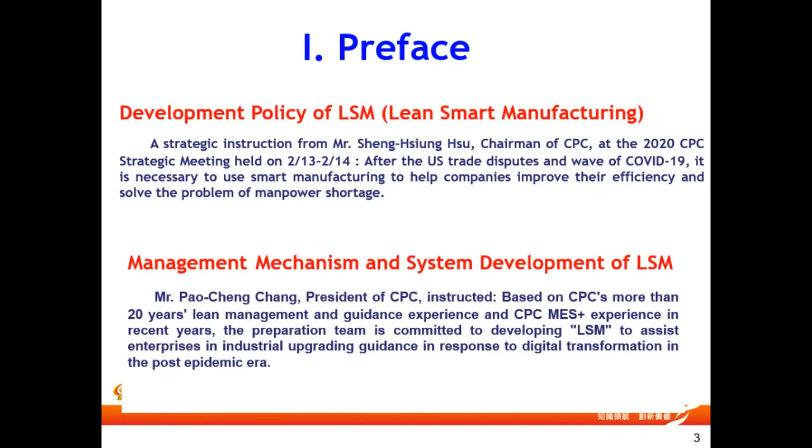More than 1 year ago, in one of the strategic meetings we held here at CPC, Chairman Hsu declared the strategic objective to help more industry become more efficient and effective. And President of CPC, Mr. Chang, also told us that we should build on lean management so that we can develop lean smart manufacturing. This is how LSM came into being in the first place.

So what are the relationships between the two concepts? Many people think smart manufacturing is just about automation and the use of a lot of information technology. That's not right. Actually, smart manufacturing must be integrated with management.

Many people in the industry may feel that there's nothing wrong with our manufacturing processes. However, the efficiency or performance are just not as satisfactory, or the automation level of the production line varies greatly, and there are new machines and old machines.

How can we make sure that our smart system is fully integrated with our existing manufacturing system? If we can put into place lean management, we will be able to make more efficient and effective use of our resources. And when planning production processes, we can also take into account industrial transformation.

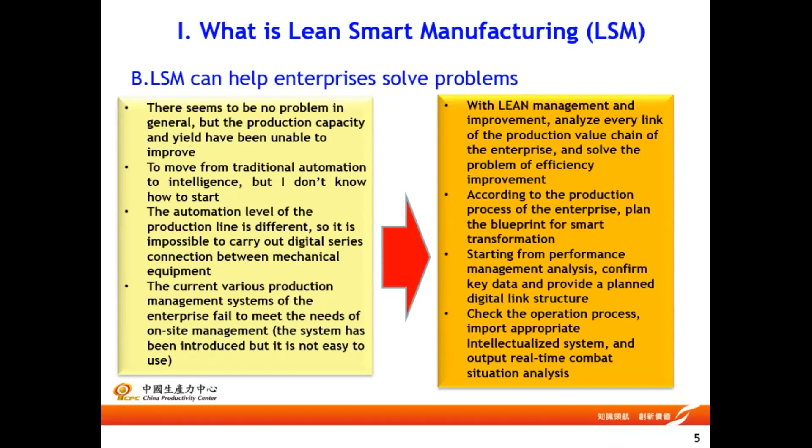Data collection can be better combined with our management and performance management analysis. At the end of the day, we want to have real-time combat situation analysis. In other words, LSM will be the key to solving all the problems faced by the industries.

LSM, simply put, aims to build on green energy technologies, providing lean management and services, and by applying the CPS, we will fulfill the development of Industry 4.0.

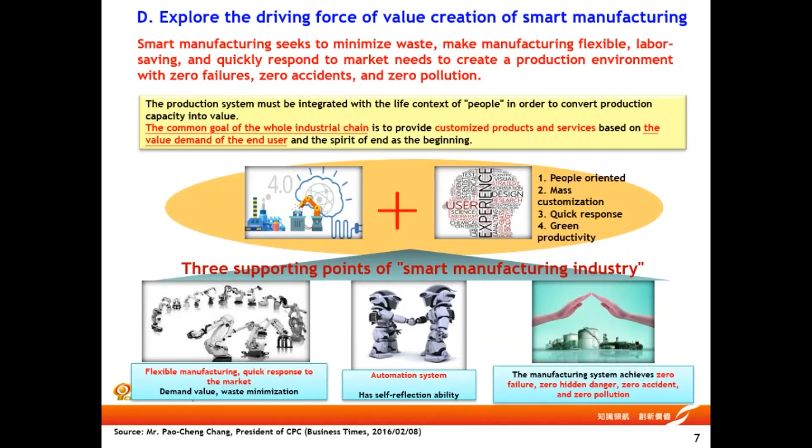Speaking of smart manufacturing, there are 3 objectives. First, flexible production, better meeting needs of the market. We can have zero waste. Of course, smart system will be able to detect mistakes in the process and system. Ultimately, we hope there will be zero failures, zero accidents, and zero pollution.

The CPC team has come up with this particular framework. About more than a year ago, actually at the end of last year, we published the report on LSM.

To start with, under this framework, there are 6 tools. I will go through them one by one. The first one is, how do we use smart technology to achieve automation?

There are 2 cornerstones of Toyota style production. The first is Kanban. The second is automation. But today, we use one smart Kanban, or S Kanban, or SM Kanban, or some people call it E Kanban. The second is E automation, or some people call it S automation. I'd like to introduce the first one first.

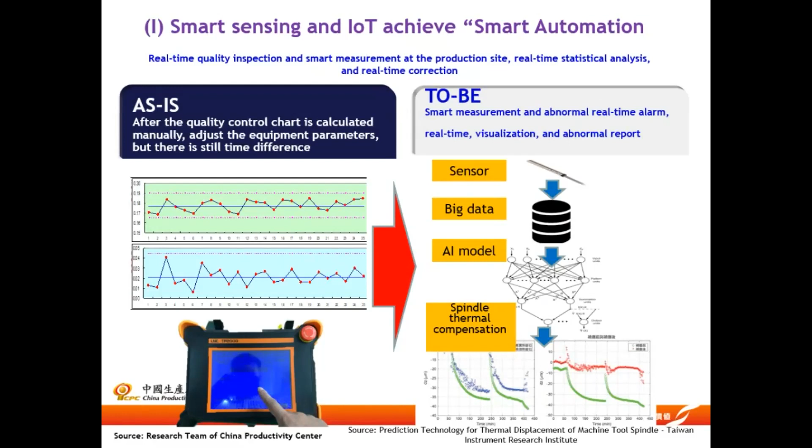When it comes to automation for Toyota style production, it means that there should be a warning in the event of automation equipment anomaly, and there will be automatic calibration or automatic suspension. In the past, we use human efforts to conduct statistics, observation. We hope that in the future, we can leverage sensors to analyze data. In other words, what do I mean by smart application? That is to allow the equipment to predict problems so that we can prevent the occurrence of problems in advance.

Secondly, with respect to parameters for chemical plants, in the past, we use a lot of labor. We hope that in the future, we'll be able to leverage the sensors to provide information to the control center. And then we can record all the data. And then in the future, we'll be able to trace all the data for our purpose.

I just talked about automated equipment or machinery aspect. But what about assembly lines? How do we deal with assembly lines? I can give you some examples. When you deal with shop floors, there may be circumstances of poor performance or defects. We use different lights to indicate the status, and for measurement we use some kind of a Vernier caliper to take relevant measurements.

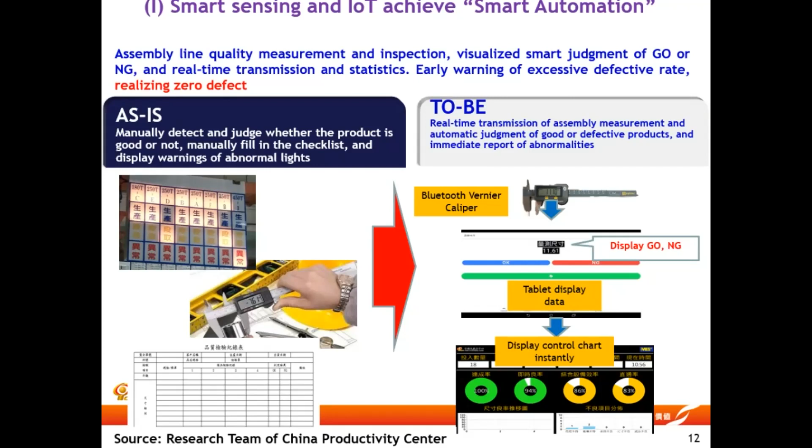But I don't know whether you have thought about that - after SPC, the data in the morning cannot be shown until this afternoon. The production has been completed already. That will be too late. We hope that in the future, through our smart system, through our Vernier caliper, we'll be able to transmit data on a real-time basis so that we can address efficiency issue on a real-time basis or quality issue. If the defect rate is too high, the information will be pushed to the phones of various supervisors proactively.

Now let's talk about the level of equipment. As we all know, before a piece of equipment fails, take a motor for example, before it fails, the bearing will be very noisy and the temperature will be higher. In the past, vibration will be higher, and we use our ear to hear and we use our hands to touch and feel the vibration.

But today, we can install a sensor. The sensor will record vibration, noise, and temperature information and send it to our visualization system so that we can understand the status of the equipment on a real-time basis. So this is about how we can transform automation into smart applications. Then I'm going to talk about real-time reporting to implement just in time.

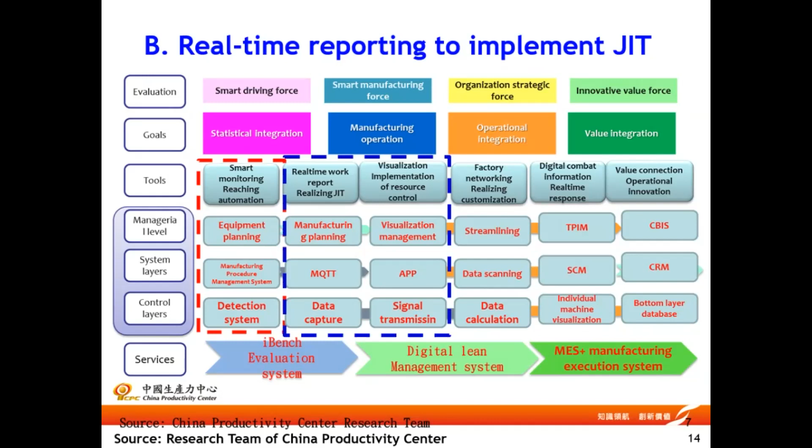But some concepts are quite interchangeable or common. Let me cover all these concepts together. First of all, when it comes to smart Kanban,

for traditional Kanbans, they are used for lean management or Toyota productivity management. The Kanbans were used to deliver process data, and the Kanban is used to identify or show information about the materials that should be prepared or the station to which the materials should be delivered.

But now we can use our phone or our computer screens. We can transmit real-time information about the production progress, and also working process information and the quantity involving work in process. So we can understand the dynamic information on a real-time basis. And the information can be used for preparation of materials, and then we can further implement or carry out just in time.

Because for Toyota style production, they use Kanbans to deliver on-site information when it comes to material preparation or material requisition. The Kanbans can be inserted to indicate whether the materials have been received or the stage of material preparation. Here you can see this kind of information through the Kanbans.

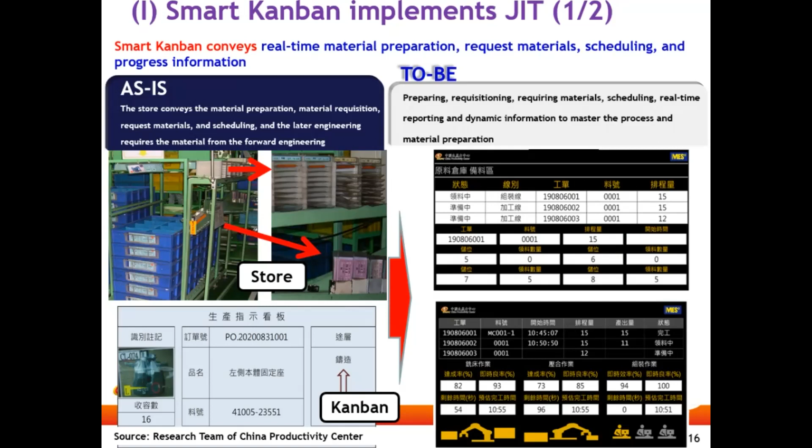However, the drawback is that you need to come to the site in order to see all the information. However, if your work job location is not here, it will be very difficult for you to gain access to the information. But we hope that we can use our cell phones to understand the current status of material preparation, material requisition, or material request and scheduling, so that we can support the promotion of JIT.

When we are doing material preparation or scheduling, we could use Kanban, as I mentioned previously. Another thing is that we can reduce our different categories of waste. In the past, we used a fixed quantity, a fixed location.

And in the past, we also used Kanbans or cardboards or bulletin boards or other visualized material labels, or we can use 3 different colors of light on the machine to indicate different statuses. And through the different lights, you can see the different status of operation. The red indicates abnormality, so it can show you information for the purpose of management.

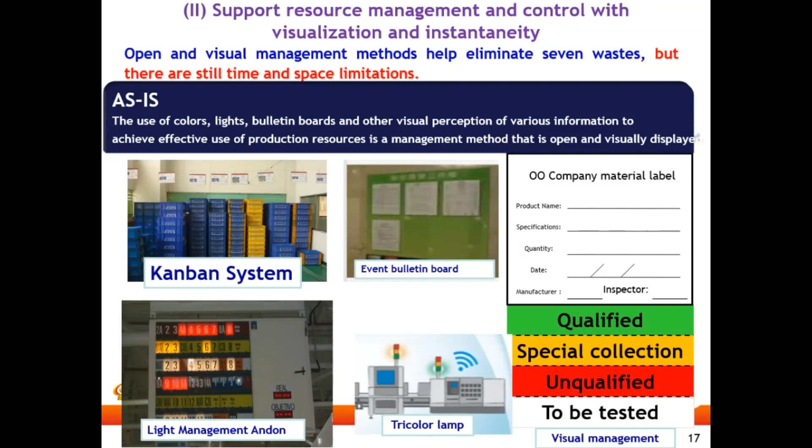So in the future, this is not what we want for LSM. We hope that we can have a control room style of information display, so that for different work sites or different production lines, information will be displayed on a real-time basis.

And on the processing line, we can use a set-top box to transmit information on a real-time basis. On the assembly line, we can transmit information about the quantity of the products handled, and also the status of the material preparation. The information as such can be integrated and can be accessible on a remote site.

Now I'd like to talk about things about factory networking practice. Recently, particularly people in Taiwan have been talking about digitalization or digital equipment. In the past, we dealt with analog equipment, and now we are looking at digital equipment and also optimization. And before the era of ERP, in the past, we had warehousing systems, accounting systems, production operating systems, which were separate. Now they are integrated into ERP.

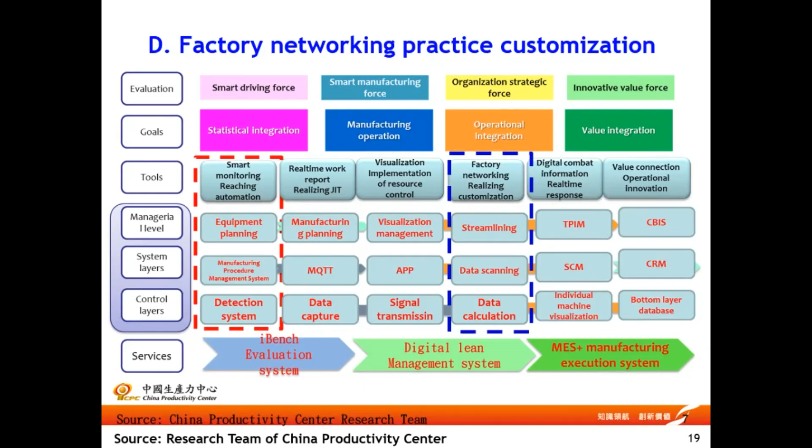So the key to LSM is to connect different equipment.

In the past, the weakest element is production information in the context of ERP. For the picking of materials, distribution of materials, the quality status, or the dispatch of labor, we need to use bulletin boards or forms or oral communication to communicate with the production site. And the production information on site, as well as efficiency and progress, such information could be communicated through daily production report, or can be typed into the computer system.

For daily production reports, usually they are input the following day, so you only see historic data. For SPC quality data, you'd be doing a good job if you can generate the data in half a day. So you can see some kind of gap in terms of information.

So through digitization, we can improve the linkage of different data. In the past, when it comes to TPS or lean management, all the production information was communicated through light signals or through Kanbans.

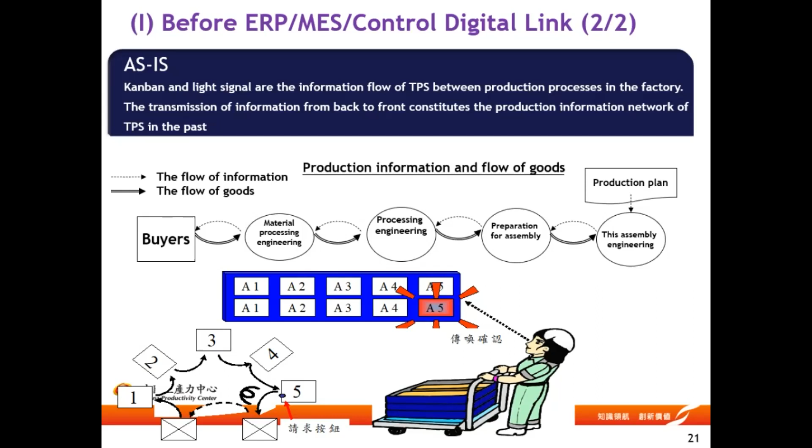In the future, under LSM, with respect to equipment, we'll use set-top boxes, and for assembly lines, it has to be highly customized. We need better control of different work pieces, and for the material warehouse, we can use SCADA, MES, or ERP. We can connect different data streams on a real-time basis, so as to achieve what we call a digital linkage.

So that's why we have come up with a simple structure like this. In the context of the production line, we have our equipment, assembly lines, through PLC. Why do we need PLCs here?

Because sometimes you may have heard of the term I/O links. For smart sensing and measurement, we can use I/O links for sending information to SCADA. Another way is to use PLC. PLC is not only for control; you can transmit data from sensors, and then the information can be sent to SCADA. And this is the architecture.

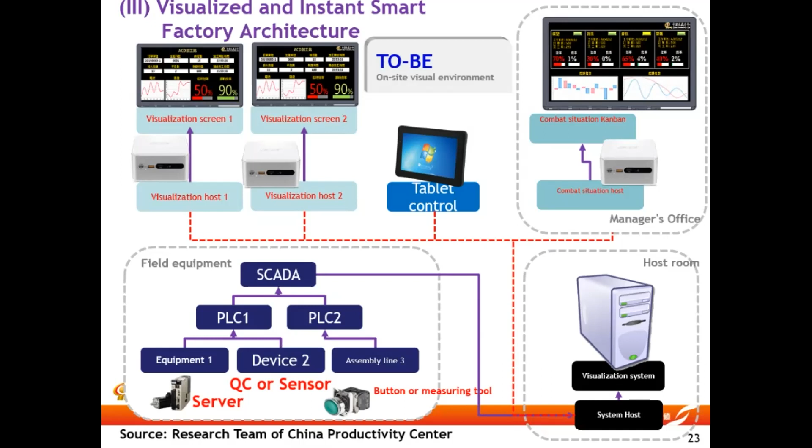Through our computing, we can display the information on a real-time basis in a highly visualized manner. After such data connection, our production data, dispatch of labor, or material collection can generate integrated data. On site we can have real-time dispatch of labor, and also transmit on-site data on a real-time basis to the ERP and the business system. The whole structure is highly digitalized.

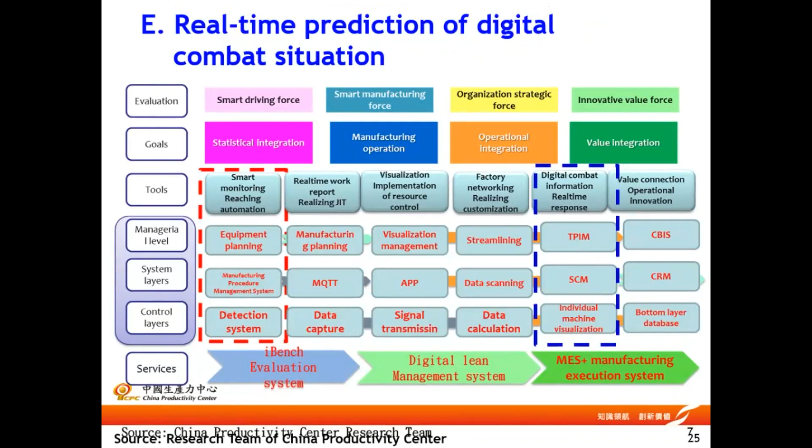Next, we would like to talk about digital real-time control and command. To begin with, traditionally, before smart technology was available, we relied on lights or status indicators for efficiency, quality, or quantity, LED lighting, or a whiteboard on which we wrote down the progress. Or sometimes we would issue alerts or warnings manually to our staff.

But this is a thing of the past. In the future, we're going to present everything from real-time efficiency analysis, performance analysis, management, and operational data. Once collected, it will be computed and linked to the ERP and MES system immediately. As a result, production data can be visualized in real time, transcending time and space.

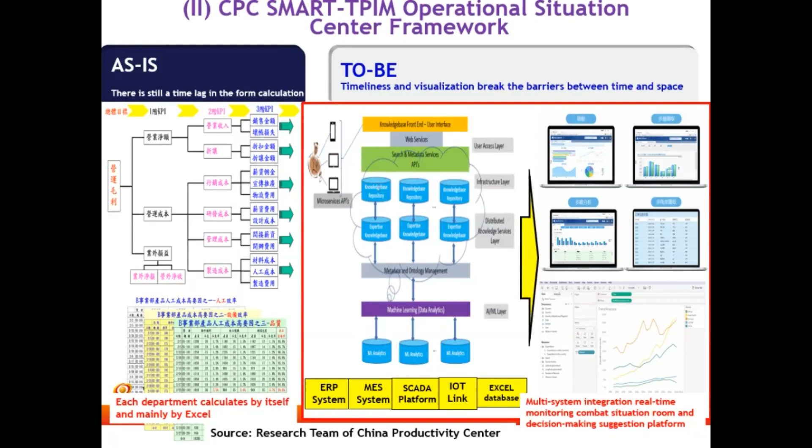Let me say it again: production information, to the far left, will have to be linked with costs so that we can produce adequate budgets. Therefore, efficiency is embodied not only in production but also in operational efficiency. We can set a range of KPIs to review production efficiency, so we'll be able to predict and preempt any potential problems.

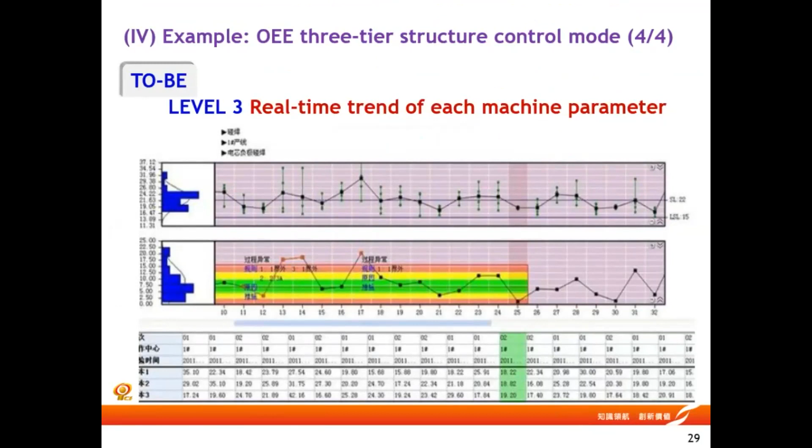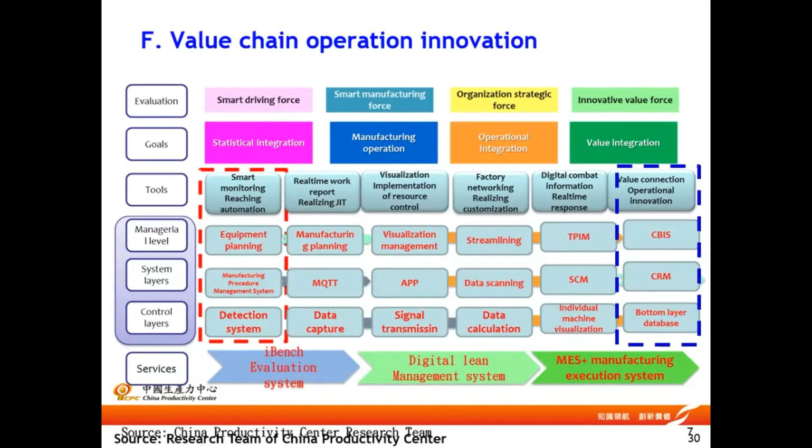All the parameters on different machines can be calculated and computed based on big data technology. So the parameters of different machines, how each machine is running, can all be monitored in real time. Last, I would like to focus on value chain operation.

Now, in Europe, especially with Porsche, basically, if you purchase a Porsche, the vehicle itself is not that expensive. But if you want something tailor-made, either the wheel or the tire, for small tailor-made elements, it will cost you more. Customization is the key.

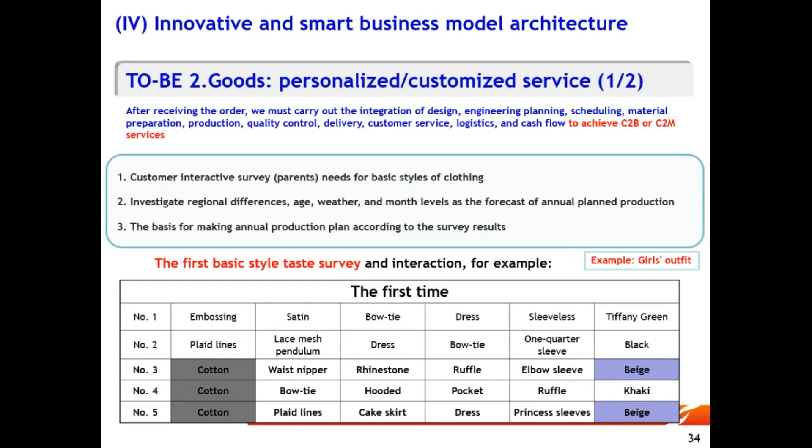Secondly, we have to know what products we are talking about. People are accustomed to wearing specific kinds of clothes of particular fabric. Some like checkered patterns, some like one-piece dresses, some like cotton clothes. So when trying to identify customers' needs, we can identify the fabric of their preference and the length of the sleeve their customers prefer. This is how we collect preferences of our customers.

But there are more details to pay attention to. For example, maybe they like to have ruffles, maybe they don't like to have buttons. With such knowledge, you will be able to notify your customers when you have new clothes coming into your store which meet their preferences.

We know that for customized products, the cost will rise on average by 20%. So if you already have such information in hand, you will be able to meet their needs without having to pay such a high additional cost. If you have membership, it's very easy for you to know their preferences.

However, production is still the key. When you purchase raw materials for your production lines, you have to use technology to help you save cost. That is why smart manufacturing can come into play.

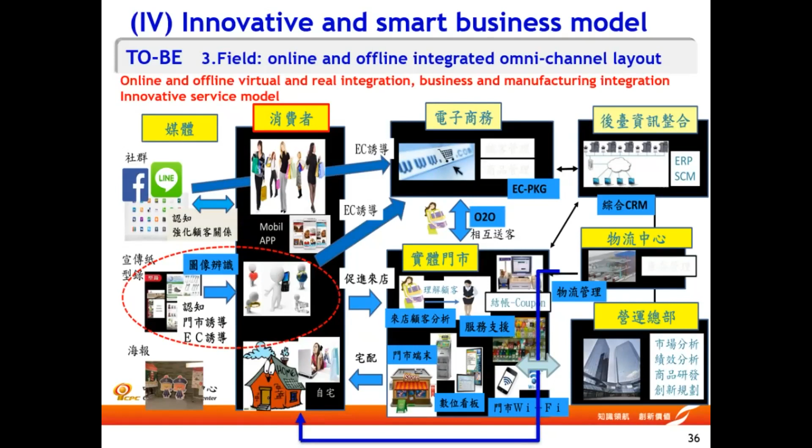Next, whether it's as-is or to-be, we are talking about omni-channels. If a factory is serving makers or customers—well, if we are talking about a brick and mortar store, a department store for example, the department store can sell products in the store or online. Do you think you can call yourself an omni-channel provider if you have online websites as well as brick and mortar stores? No, you are a multi-channel provider at best. You need to have digital connection to become an omni-channel player.

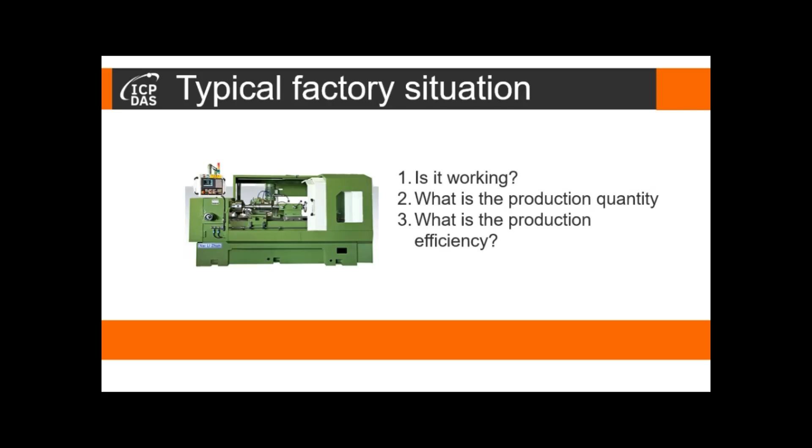In Taiwan, Malaysia, Thailand, or Vietnam, the manufacturing industry is facing a number of problems in the production process. Usually, the production line may have problems—whether or not the machine is running adequately, how efficient are the machines. So basically, we made our very important first step based on these systems.

I think companies first have to consider their own situation. If you have mostly Industry 1.0 or 2.0 machinery, you need to connect data through I/O, or you may need to set up additional sensors to obtain data. If you have machinery above Industry 3.0, my recommendation is that you can extract data from the internal data module. For example, Siemens PLC or Mitsubishi PLC. You should be able to obtain data directly from the machines, or you can use communication or additional sensors.

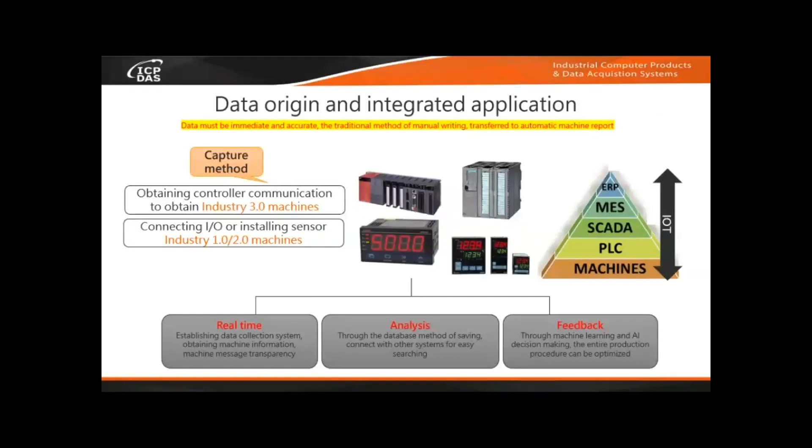Through the IoT, the information or data can be streamed, and then you can obtain real-time data. You can conduct smart analysis and provide feedback for decision making. This is a very important step. Originally the data were delivered manually, but now we can combine the data for real-time feedback and decision making.

Let me give you an example. When we are monitoring the status of machinery, we can set up a sensor called a smart meter. The function of the smart meter is to sense the status of the machine. In this example, the machine is working on the heating or drying of plastics.

We need to control the voltage and current of the machine. If the current is too high, that means the heater has a malfunction. If it continues to operate, there may be a fire triggered by the failure, or it may trigger quality issues. So by monitoring the current, we can prevent fire hazard, and secondly, we can avoid defective or quality issues.

Another example is the shoe making business. There is a gluing step, and temperature control is very important. We set up a temperature sensor and apply glue to both sides of the shoes. After gluing, the shoes go through ovens, so temperature control is very important. You can see upper, middle, and lower temperature points. The IoT sensor should be set up at the appropriate location, and data will be generated continuously so you can understand the temperature curve at different stages.

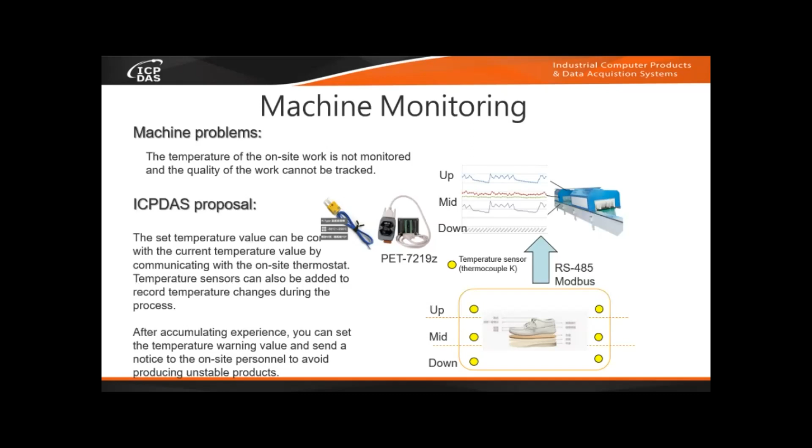We can trace the importance of temperature based on the quality of the products, set proper temperature parameters, and set up relevant warning thresholds for the temperatures.

In the production process, we can also use this kind of caliper to take measurements at different points. In the past, we did that manually, and there were time lags. Now we use Bluetooth technology, and the data from different points can be transmitted and recorded directly in the back office.

Also for predictive maintenance of important equipment such as motors, we can use sound, current, or vibration to diagnose or predict the current status of the motors. With a 3-in-1 sensor, by measuring the current, we can gauge the health status of the motor to see whether it requires further maintenance. If we go even further, we can analyze the data to find the causes of past motor failures.

In Taiwan or Southeast Asia, whenever we are promoting smart manufacturing or Industry 4.0, one important thing to bear in mind is that we often consider our needs first. Our company provides solutions beginning from the pain points of the companies, and then we set up our IoT equipment. If you have requirements for temperature surveillance, we'll start with temperature surveillance. If the use of electricity is important, we will start from there.

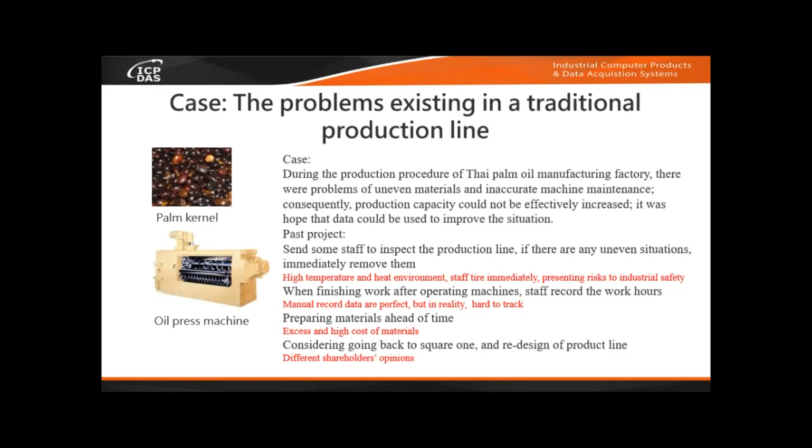So they were thinking about leveraging Industry 4.0 to address the issues. Under our company's advice, they set up some IoT sensors on their machines. Actually, it's a smart meter. For each oil pressing machine or motor, we set up a smart meter, and it will generate very important information.

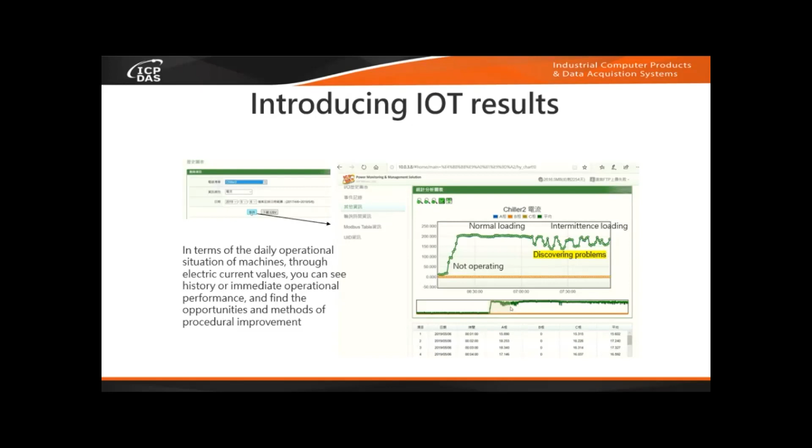The data are real-time, recorded or extracted from IoT controllers, and also stored in the IoT controllers. So the first step for smart manufacturing is that with respect to production line issues, we should first identify a pain point. For example, here we're looking at efficiency, and the parameter corresponding to the efficiency issue is electrical current. We can measure the different electrical currents, and then identify issues that emerge at different times. So we set up the sensors, extract data, and identify the root problems in order to address the issues.

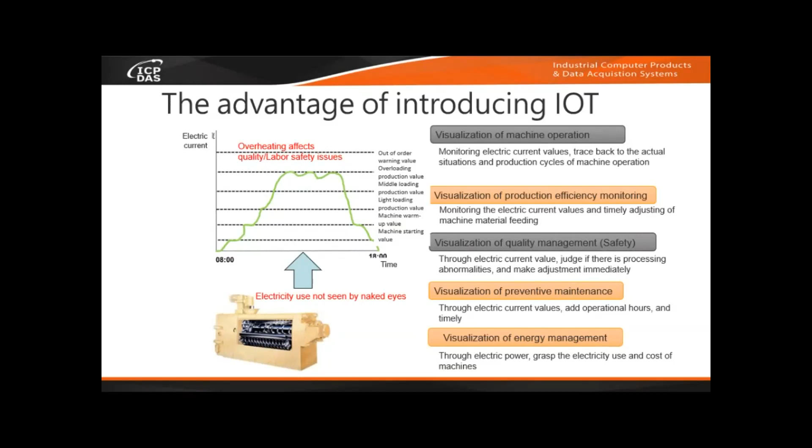So by setting up IoT sensors, we can visualize the situation of the production site. The visualization can help us manage the situation before, during, and after the fact. And then we can have a visualized platform to display all the on-site information.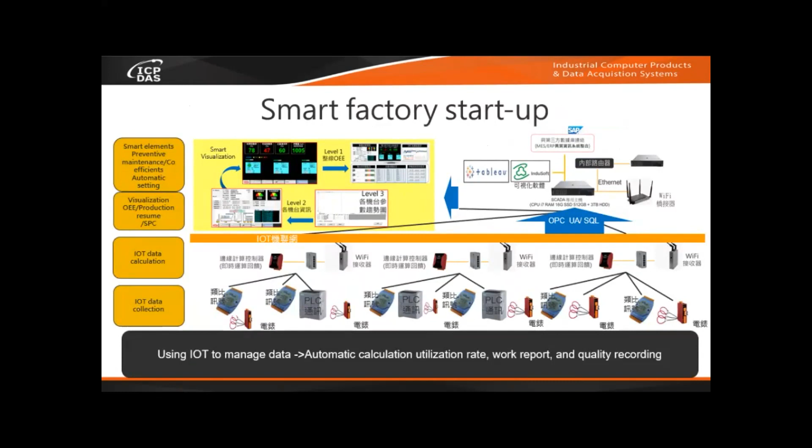For example, at the SMT production line, we can monitor the equipment and the productivity status of the entire production line. We can also use the Line app to send or distribute production information in real time to relevant people. So we can use IoT equipment to extract data, gradually expand the application, and ultimately come up with a smart manufacturing roadmap.

Let me give you another example. This is a factory that produces packaging boxes. They have very complicated production processes. They need to deal with different sides of the packaging boxes. And their equipment is very sensitive to temperature.

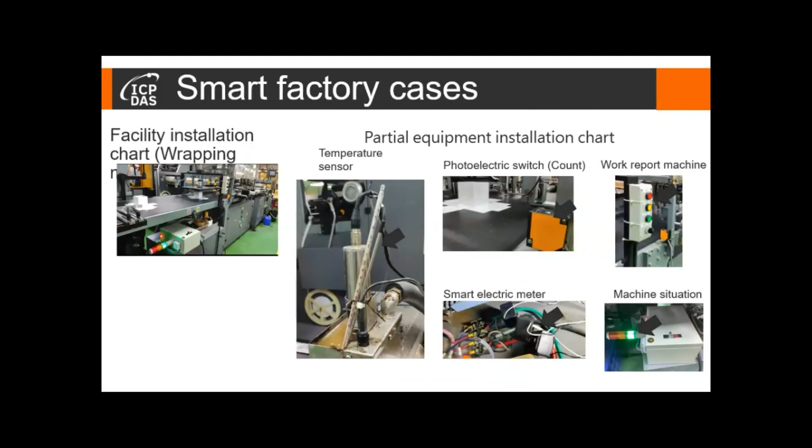So we set up sensors to take data regarding the pace of production, and also set up smart meters. After these IoT devices are set up, what kind of results can we see? First, we can extract production data every second, or maybe every minute, depending on the needs of the production lines. So that's the first step - we need to record the data.

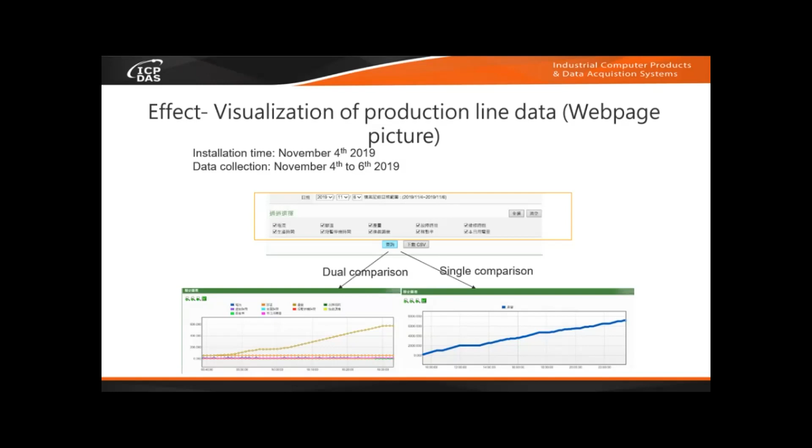And also we can have real-time monitoring. After the data are recorded, we will be able to compare the data by way of visualization, so we can see the changes in production by comparing production volume and production status. And then we can predict what the future will be. In this case, we can see the production temperature and the production volume. You can see the temperature is dropping at a circled portion.

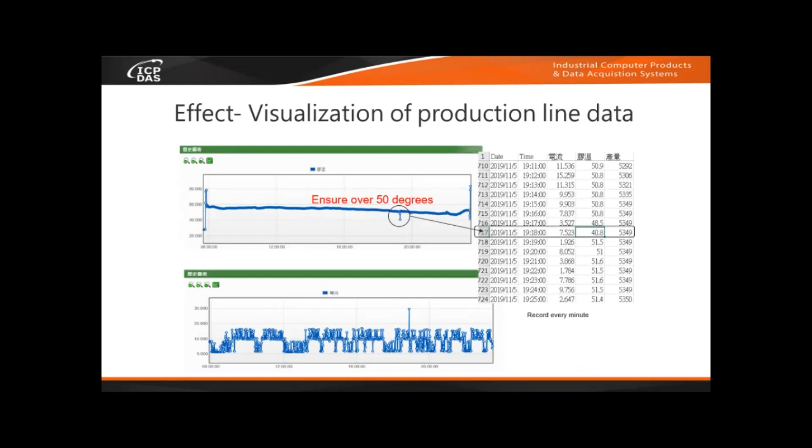For attaching labels to the packaging boxes, temperature is very important. So abnormality of temperature may cause quality defects. This kind of sensing is very important.

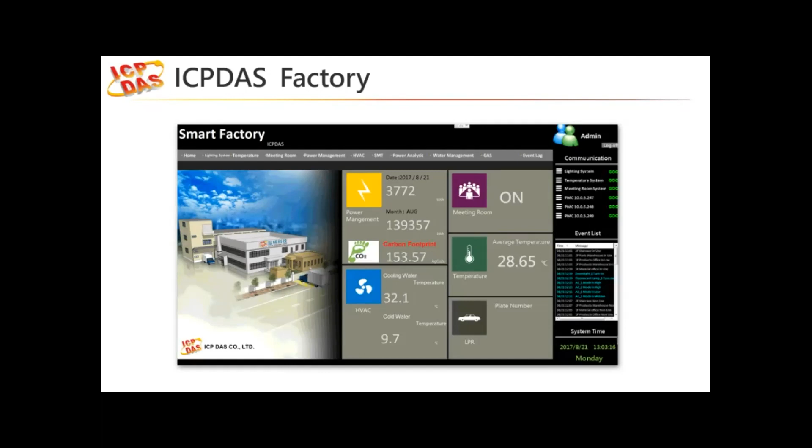So if we combine all the data, we will move to the upper level, that is SCADA. This is the smart factory management system we developed in-house. We will be able to monitor the carbon emissions, power usage, including the situation on the production line.

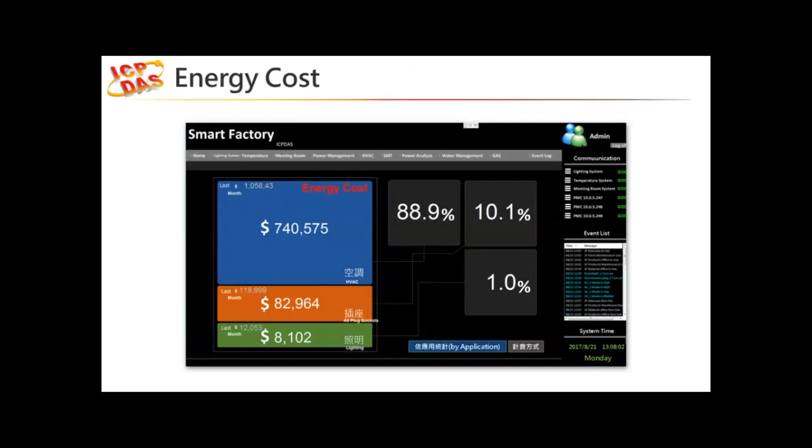At the same time, we will be able to calculate the cost, including energy cost, water usage, water cost. If you have a water meter, you will be able to calculate the cost of water used today. And of course, we pay close attention to the ambience of the office.

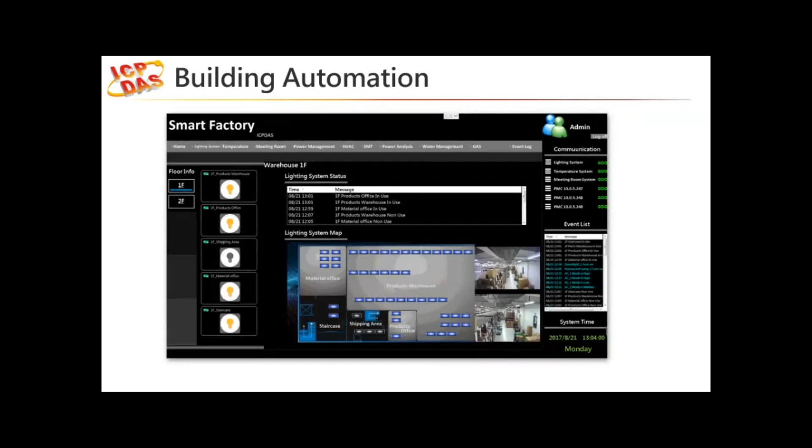So we do have sensors to check lighting, emissions. The same goes for warehouse environment. We can have very close monitoring of the warehouse environment. If there's too much humidity or the temperature is too high, alert will be sounded and measures will be taken to protect equipment inside.

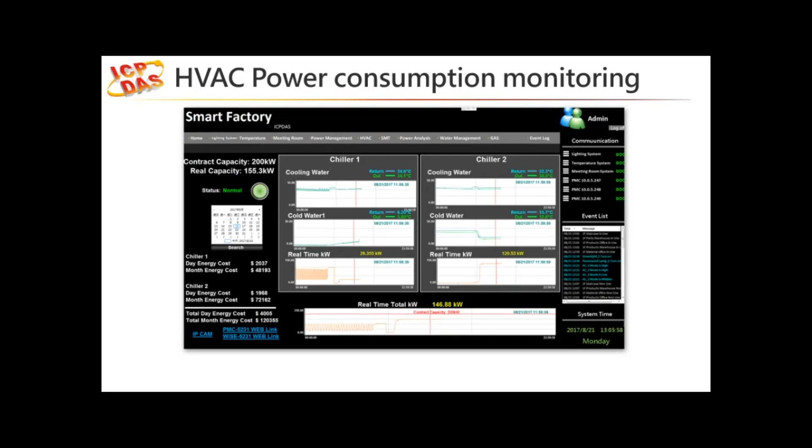HVAC system very often is the cause of problems. We have to make sure that you don't use up too much electricity, otherwise the company may be fined by local authorities.

Smart manufacturing is basically applied to the machine or production system already in the client's premises. So that is the basis. And then we identify pain points where we will install sensors. That is what I meant by from point to line to plane. In other words, you don't start installing a huge system from the very beginning. Rather, you start small.

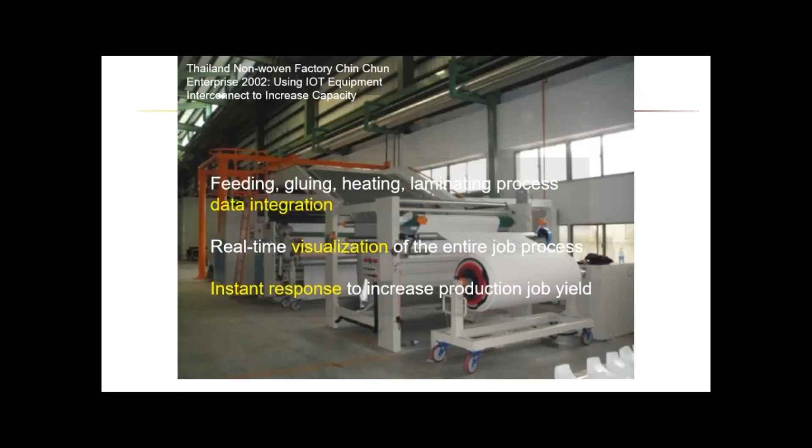For example, in this Thai oil mill factory, this is how they began their smart manufacturing journey. The same goes for this non-woven factory in Thailand. This is another example in a food factory. The PLC data are collected so that the temperature of the production line can be better monitored.

This is another example. We help a company in Malaysia, again, by collecting data from all the machines on the production line. We will be able to provide visualization of all the production data. Most important of all, we provide training so that they can develop their own system in-house.

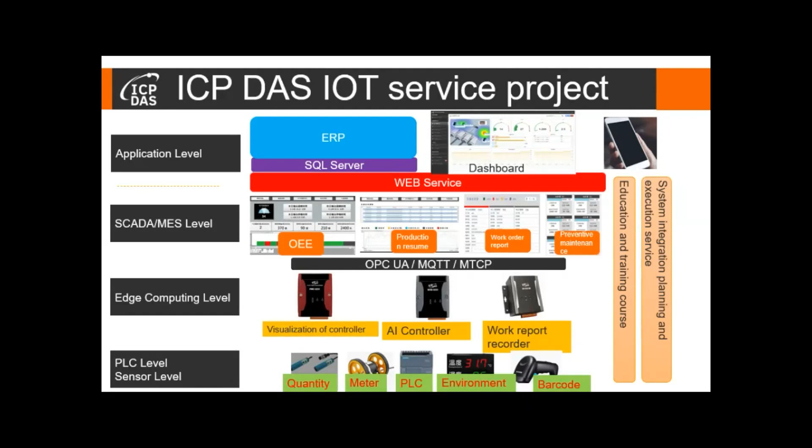That concludes my presentation. Thank you.

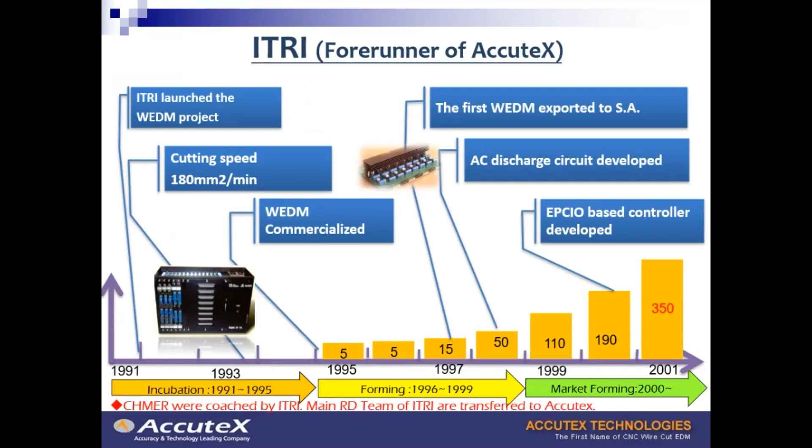development of CNC. For decades, Taiwan's technology was not up to par, but now we have been able to produce CNC, very sophisticated CNC. Here you can see we have many clients based in different parts of the world. And you can see in this particular sector, our competitors are in Japan mainly and in Switzerland.

Why are there so few CNC makers? It's because it's very difficult to get the key technology for wire EDM. You have to develop your own core equipment, including lathe, water, and temperature control systems. So it's a very highly integrated solution.

There are a few existing solution providers, not to mention the solution we are looking for must be very accurate, precise, and cost-effective. So because of the demand for CNC software and hardware, once they are developed, it will be easier to meet the need of Industry 4.0 because we control the CNC hardware and software. We will be able to help our clients.

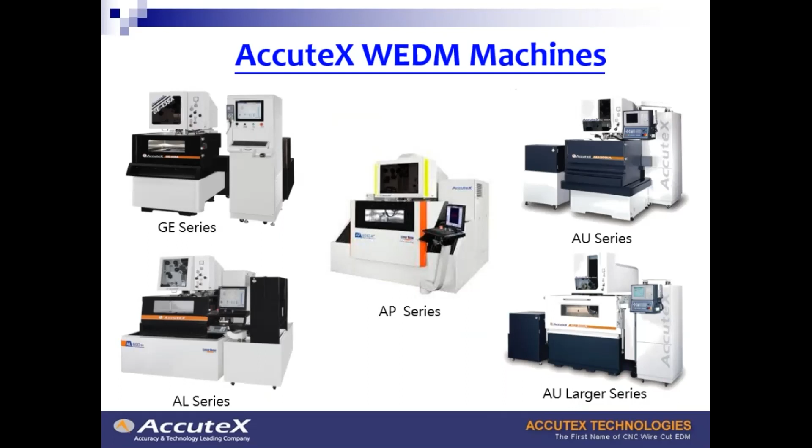Here's the range of our products. You can see the different sizes. Wire cut is usually used for mold manufacturing. There's something unique about mold. In most production lines, usually there's a set production quantity, but for mold, usually you only need one.

However, if you want to become Industry 4.0 compliant, you need to go for automation, auto design, automatic feed of material, automatic detection. These are the criteria of Industry 4.0 or smart manufacturing. So we have to do more than just automation.

In Taiwan, there are many machine makers. They have come up with their own version of Industry 4.0 software or SCADA. They have their own MES systems and develop their own detection systems. I asked these companies, among their clients, how many use products only from their company? I think many big companies dare not say 100%.

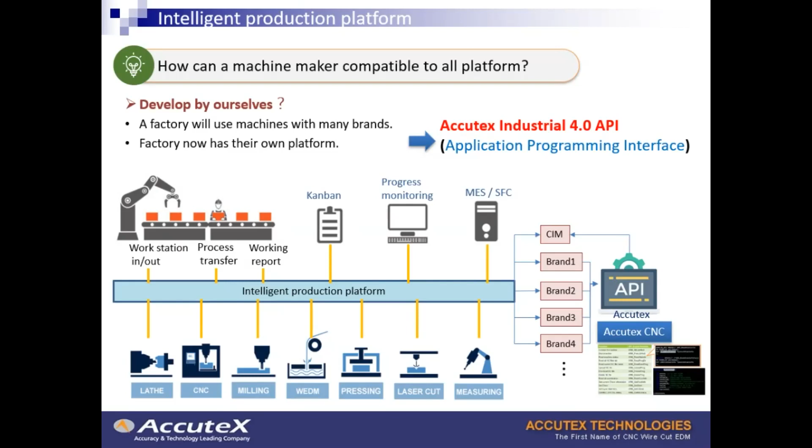If the client wants to build a new system, a new complete system, we need to provide a total solution which is able to retrieve and store data, even from the design stage to processing, oversight, manufacturing, processing, and report. This platform can be very helpful.

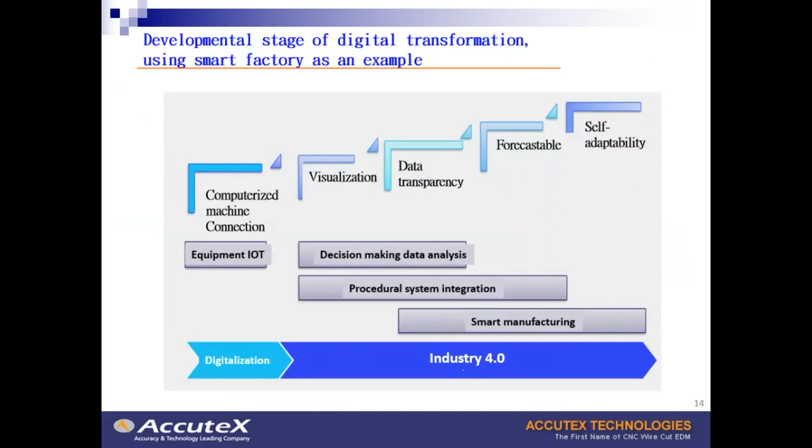From digitalization to Industry 4.0, we need something visual that can be visualized, or something that can be used for prediction.

So when you have a project, you need to begin with a design. From CAD, you need to convert to CAM, and then conduct simulated analysis or structural analysis. That is for CAE, and then different programs will be required, for example for molding or CNC. And then if you need certain precision, you need a measurement at the stage of CAD and CAM, the measurement critical points will be generated.

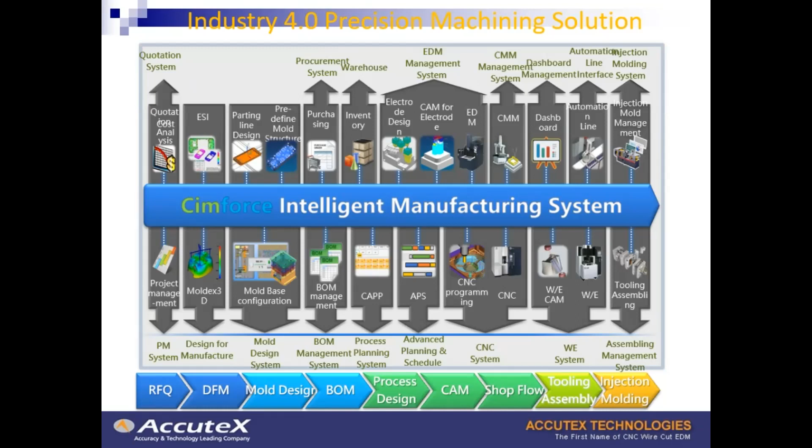And then purchase system, inventory systems, CAPP, CNC programming, CAD/CAM system, EDM. After processing, there is automatic measurement taken, and then you can use self-guided vehicles or robots for transportation. Then you can use RFID for system determination, and a corresponding program will be activated. So that's the smart manufacturing structure I just talked about.

For a machine maker, the final two layers, shop floor level and control level, they fall within the scope of CNC. So the data will be sent upward to SCADA or MES.

Now I'd like to talk about the smart manufacturing system using our wire electrical discharge machining, or WEDM. First of all, we use CAD/CAM for design, and as a result of the design, the CAD will generate the CAM path or three-dimensional paths. Then three-dimensional measurement programs will be activated, and through the RFID of the same workpiece, we know what are the critical points to be measured.

Data will be sent to the cloud for computing, and then you can have automatic scheduling or programming, because we have a network line connecting with the central system. So all the Cimforce information or equipment related information can be extracted. We can get whatever information the customers need.

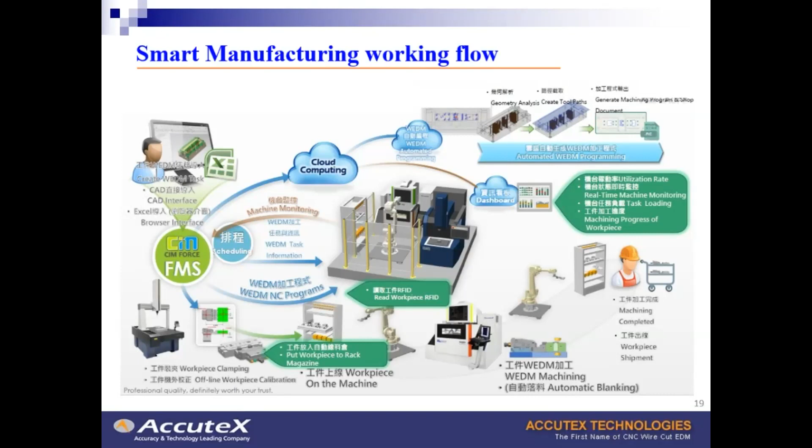This machine has an automatic feeding system, and there is an automatic system that automatically removes waste. Also in this system, you can see an automatic warehousing system. So from beginning to end, people don't need to handle any machine. People just need to prepare the materials in the warehouses, and the entire processing takes place fully automated.

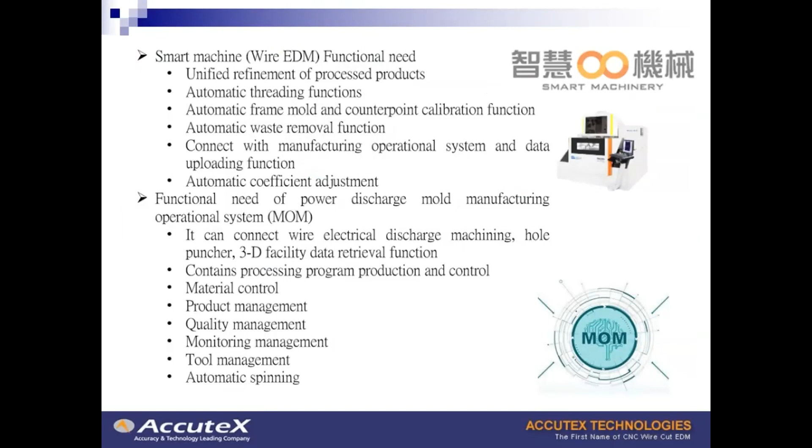For WEDM for smart manufacturing, I think the processing should be consistent. We need to have automatic threading functions, automatic mold calibration function, automatic waste removal function, and also information connection function.

I'd like to give you two examples. In the past, we rarely did that. The first is the automatic collection of waste. In the past, even though you may have automatic feeding, the waste still needed to be removed manually. So that's probably the only handicap for the automation of CNC. This is also perhaps the largest hurdle.

To address this issue, a few years ago, we started to design an automatic pickup step for waste. Traditionally, it was handled by workers manually. Ultimately, we developed a function in the equipment or machine. Towards the end of the processing, through determination by the machine, there is information that can be generated, and then a device will be used to pick up the waste.

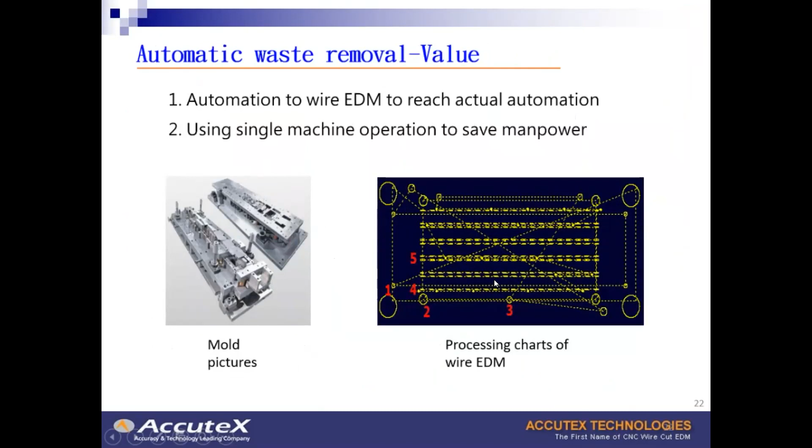So for a mold, you can see many holes because this is a mold. There are a lot of wasted materials, and the machine needs to determine the processing status and also the voltage status so that the waste can be properly removed.

Another function is, in the past, for a workpiece, when you mount a workpiece, we need to adjust or calibrate the horizontal and vertical orientation of the workpiece manually so that we can achieve proper alignment. But it could not be automated because manual labor would be required, or I can buy very expensive fixtures, but you need very time-consuming calibration. So how can you ensure proper precision?

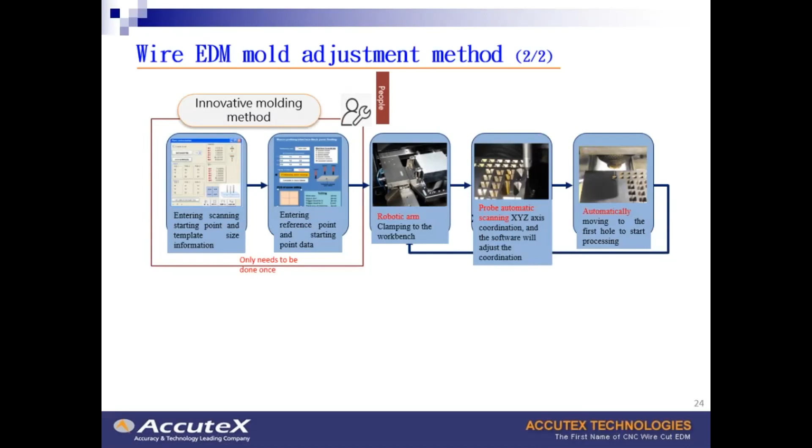And then we came up with a method. We set up a 3-directional probe. So after the workpiece is mounted, we still need a probe for final calibration along different planes. After the calibration, the program will accommodate or perform a rotation based on the result of calibration. So this is the most important benefit that can be generated through programming like this.

So this slide depicts automatic mold adjustment. You can see calibration is also conducted automatically.

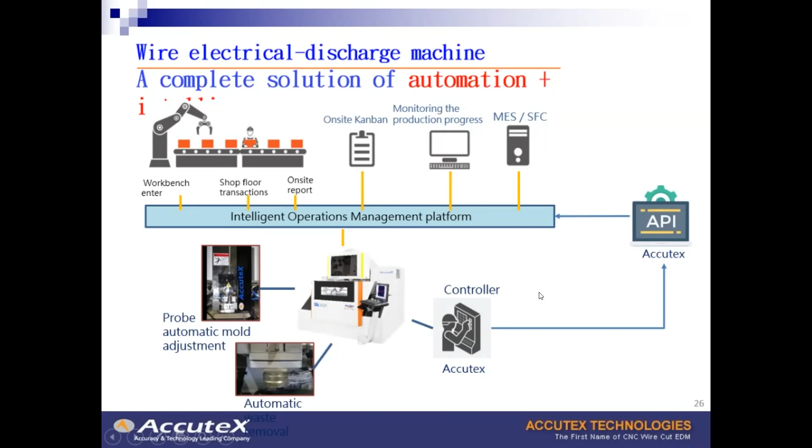So in addition to what I described, we had our API for connection with Cimforce, and automatic threading and automatic pickup of waste and mold calibration. Then in combination with CAT and also the robots, we can address the smart manufacturing needs of a factory.

This slide depicts the steps required for smart manufacturing in the context of wire EDM. For example, you need to define the aspects of parts processing. For this particular workpiece, we are not just talking about wire EDM, there may be other working processes or engineering steps. We can have automated division of workflow in the factory like this.

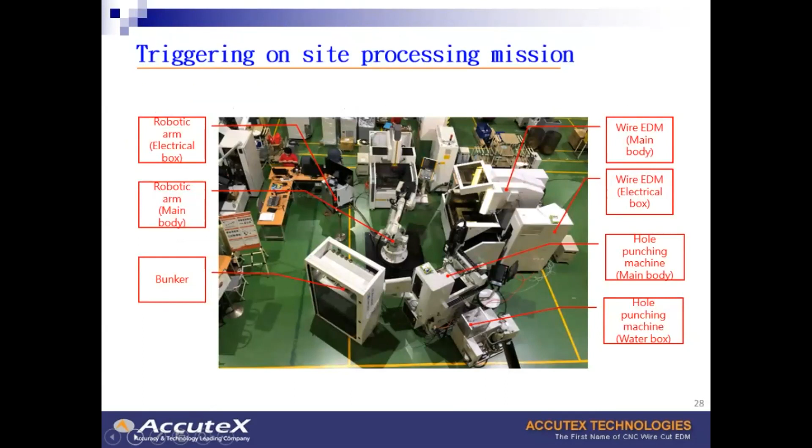This is the picture of the company's shop floor on site, and we show this to our visitors. What you see is just automation, but you don't see how information flows are automated.

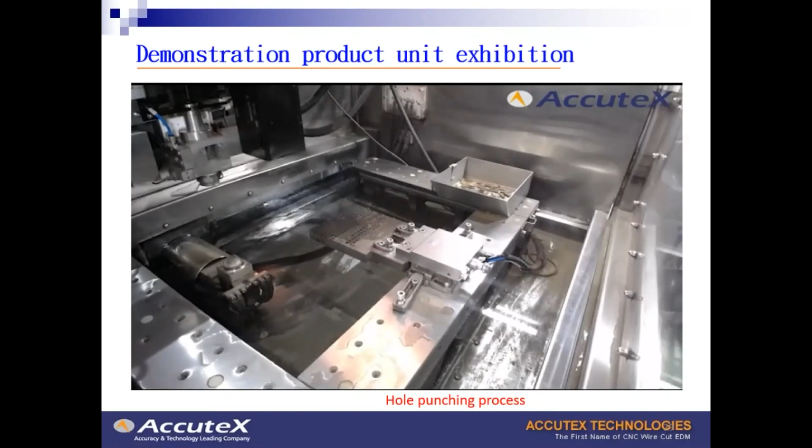This is a robotic arm. We can have an automatic pickup, and then the workpiece, the holes on the workpiece can be punched, and then the robotic arm can be withdrawn, and then we can perform other wire cutting related steps. After punching holes, we also had automatic threading, and after automatic threading, the processing will then continue.

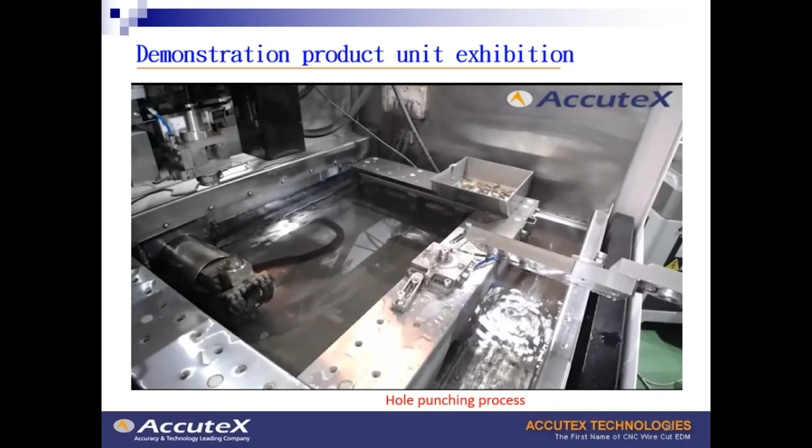Of course, this is fast forward, but after the process, you can see that this step actually in the process, the waste have been picked up and discarded. You can see the electromagnetic disc that picks up the waste, and then after the waste is discarded, the second step of processing is conducted.

I think I fast forwarded the video clip 50 times. Actually, it doesn't run that fast. It will take about 2 hours for this to be completed.

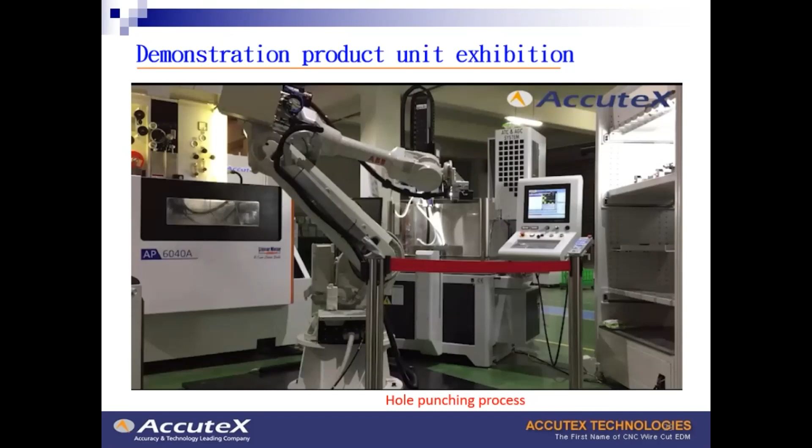So what you have just seen is part of automation. All the information has been integrated automatically. People don't need to operate or man the machines.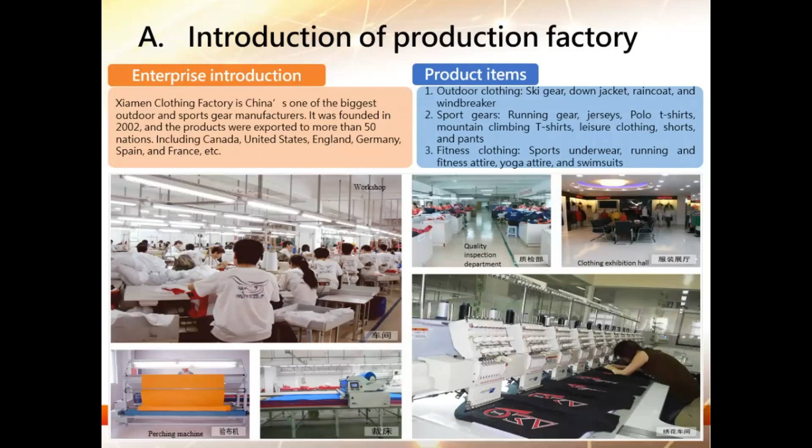Later, I'll talk about a port-o-rial system. In other words, when they built the production line, the port-o-rial system will be the main system in control. For each workstation, the port-o-rial system will determine how this fabric will move from one stop to another.

So what are the problems? There are 5 problems. The first one is the performance of the production line cannot be monitored right away because manual work was used. But gradually, with the port-o-rial system installed, they had a better idea. However, they still were not able to monitor the defect rate, the performance of production line workers. Therefore, we began to introduce the visualization system, which must be combined with the MES and ERP system. Another problem is, in addition to this factory in Xiamen, the company has other factories in different cities, so in order to have a comprehensive grasp of the production efficiency, we introduced the Kanban system.

In addition to performance monitoring and evaluation, we would also like to improve on-site management. So smart improvement to the online operation was introduced so that defect rate can be better controlled. Of course, this company also faces problems in relation to warehouse management and salary management. However, my talk will focus on efficiency and performance improvement.

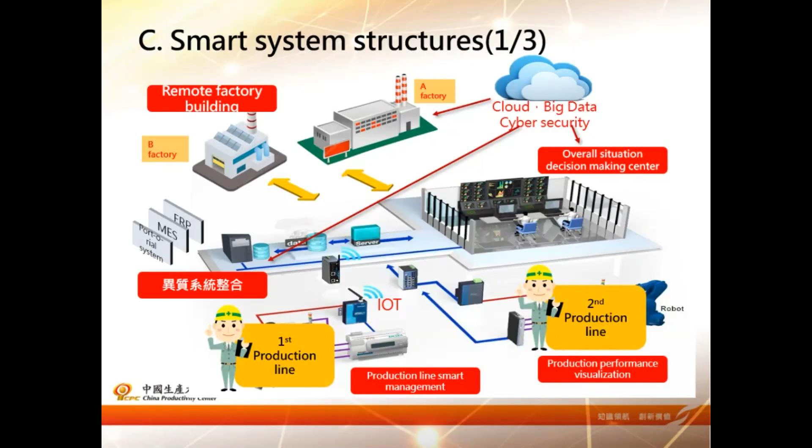So this is the heterogeneous information system I was talking about. At the bottom, there is the PLC plus sensors. Again, they are built on the existing port-o-rial system. However, at this level, you cannot visualize performance. That's why we have to combine ERP. Then we will be able to incorporate the workflow and staffing information.

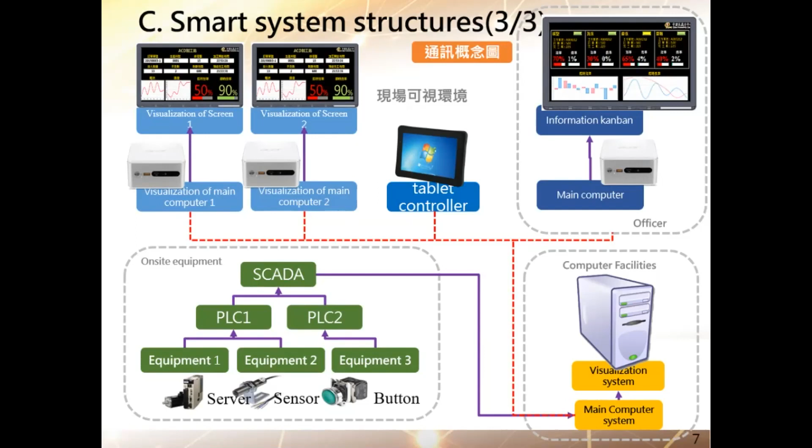Again, data across different factories can be monitored in real time, so the manager can do such monitoring remotely, analyzing what problems may have arisen and what action must be taken to address those problems. Back to the hardware, at the bottom left, there's sensors, PLC, and SCADA. Basically, this system is used to collect data from the production lines and send it to our computation center. The red dotted lines represent virtual installations, and the purple solid lines represent the hardware installation, the brick and mortar system.

Next, I'll talk about the production performance visualization, as well as the other two elements. First, the production performance visualization. On the screen, from left to right, you can see the steps taken to build such a system.

To the far left, traditionally, we have a paper-based system. We have to print out the tables and then fill them all out. However, with such a manual system, you cannot have real-time monitoring and analysis, and there may be errors.

In the middle, in 2018, uniform tables and the port-o-rial system were introduced. With the port-o-rial system, you can gather a certain amount of data, but it cannot be combined with other systems. That's why in 2019, to the far right, we introduced the smart system, where the online system and ERP can be combined so that everything can be visualized.

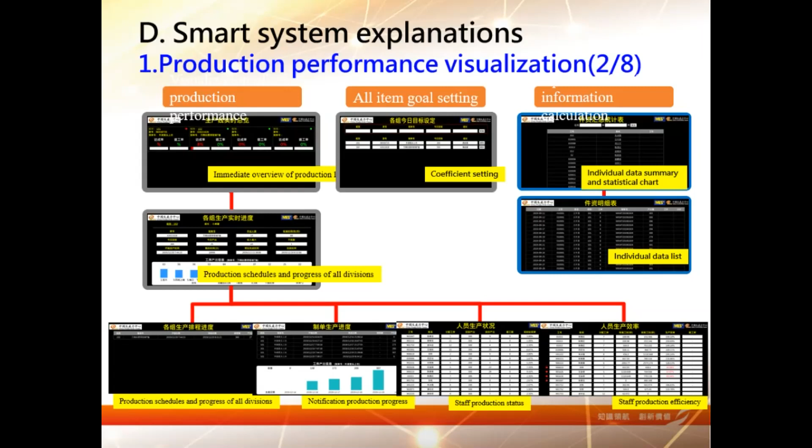Now let's look at the visualization system in further detail. Here you can see the production real-time overview, showing the situation on different production lines. Those in the orange boxes are the 2 production lines at work.

With these dotted lines, you will see how many production lines are on and what items are being produced. Most important of all, the achievement rate and the rework rate. Rework rate is a proxy for defect rate — in other words, there are defects with certain products, and they have to be returned to the production line.

There's also a green light. Green light means everything is normal, yellow light indicates warning, and red light indicates anomaly. Basically, the rework rate will determine which production line will have a red light.

Of course, there's more detailed information about each production line. For example, here you can see the actual progress of production hours of all divisions, the kind of items being processed on this production unit, the item number, order number, the number of workers on this production line, and the expected turnaround.

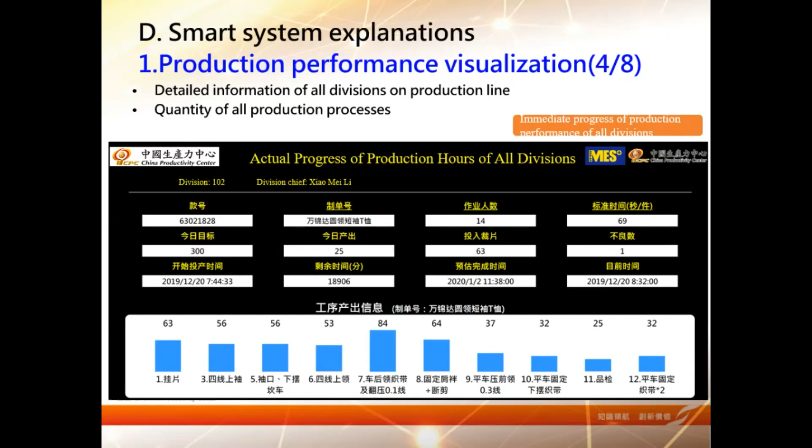At the bottom, we will be able to see the different workstations along the production line, so we can see the progress. We can also have a better idea of the WIP.

This involves the port-o-rial system. The port-o-rial system can dispatch semi-finished products to different workstations. Certain workstations may be jammed or overloaded, while some workstations may be idle, with no semi-finished materials or products to work on.

So we can have a clear overview of the different workstations. Again, through this chart, we can grasp the progress, the working progress on different divisions and units.

Again, if we look further, you can see the production line schedule progress. On this production line, we will see how the progress is going based on the ERP information. In other words, there's a lot of data exchange and integration going on.

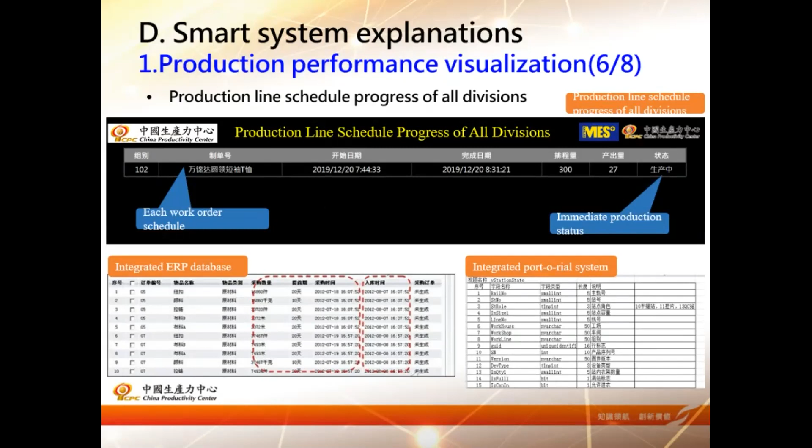We thus have a better idea about when the production begins on this production line. The achievement rate can be monitored too.

Now we can look at the different work orders to determine the progress of our production lines. You can see the daily production volume based on the work orders, and then you can see details about the daily production.

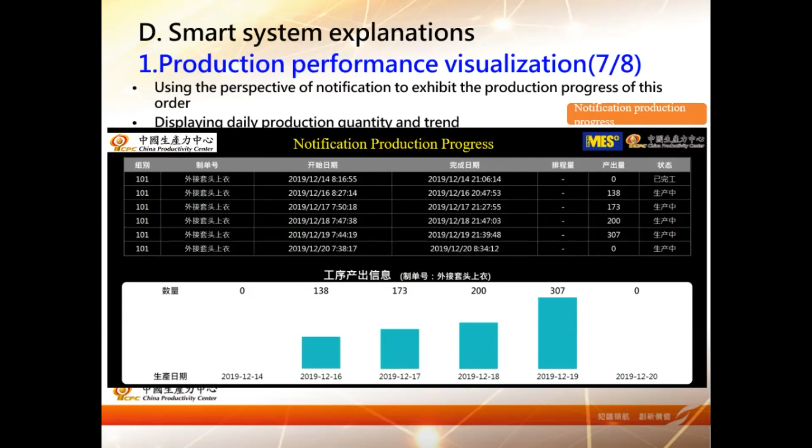So I just introduced the visualization system. Now, after the step of visualization, we also work on the headquarters situation Kanbans.

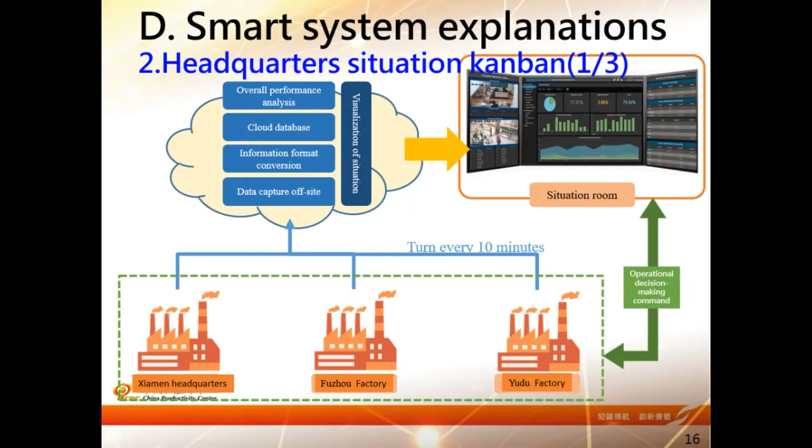So at the time of deployment, we ran into issues relating to data integration. For smart factories, real timeliness is very important. As you can see on the left, there's a smart system.

The system will extract the databases from the production sites in different places. But as a result of this arrangement, the data transmission efficiency is low, so the information extraction can take place at midnight. So the information is not updated on a real-time basis.

So we set up a relay database. The databases on the right will directly perform the data conversion and transmission to the relay database. If they can do that separately, the efficiency will be much higher. So the operation, the conversion, or the transmission will take place every 10 minutes.

And then the smart system on the left will collect or extract data from the relay database. The data extraction can take place every 2 minutes or even a shorter interval, depending on your needs.

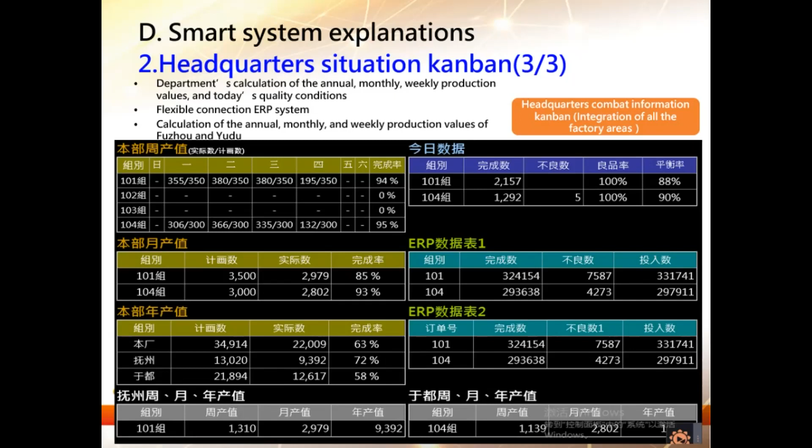Now I'd like to introduce our smart production line management system. Through the system, in addition to visualization, like I said, we can also integrate performance data of different production sites. And also through the system, we will manage the performance on-site, and we can use tablets, PCs to do that.

This is a visualized interface. Visualization will take place on site, and also the information is highly visible. It can be visualized in the headquarters Kanban, situation Kanban. And for on-site application, we can use a tablet PC, through QR code scanning, to check

the matters that should be noted for the processing or for the fulfillment of a particular work order. And also you can get information about the devices nearby, how they should be operated, so that you don't need to waste a lot of man-hours to identify or to obtain relevant information.

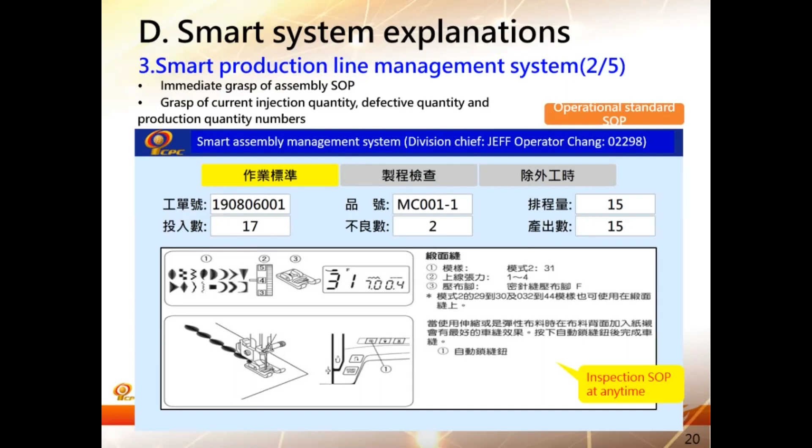This is a standard operating procedure of our smart production line management system. When you access the system, you can see the work order and also the item numbers, and now you can see the current SOP. In the course of processing, if there is anything the operator doesn't know, the operator can switch to a relevant screen to obtain information about the things they should bear in mind in operating this step.

We also have a design for inspection. That is, we can have a gated approach, so that in the course of production, if certain steps should be inspected, we can do that at different stages, so that nothing is left out and the information can be accurately reported, and the information as reported will be reflected in our system.

And the result of the inspection may be good or okay, but if it's no good, the information can also be fed into our system. And then we can come up with statistics about the defective work pieces.

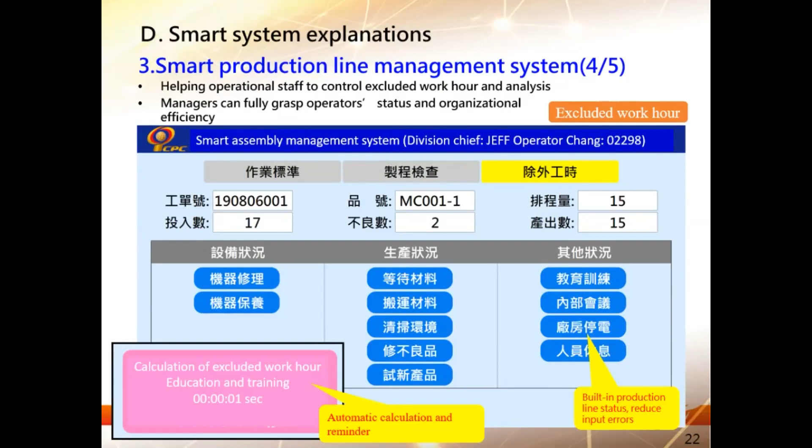And also for excluded work hours - we may need to attend meetings outside the facility. We can click on the relevant fields to input the information, and the excluded work hours can be calculated automatically. Then the performance and work hours can be properly included and calculated in our system.

So I just talked about the three major dimensions for developing the smart manufacturing system. The most important aspects include the performance monitoring system, and we also integrate the ERP MI system.

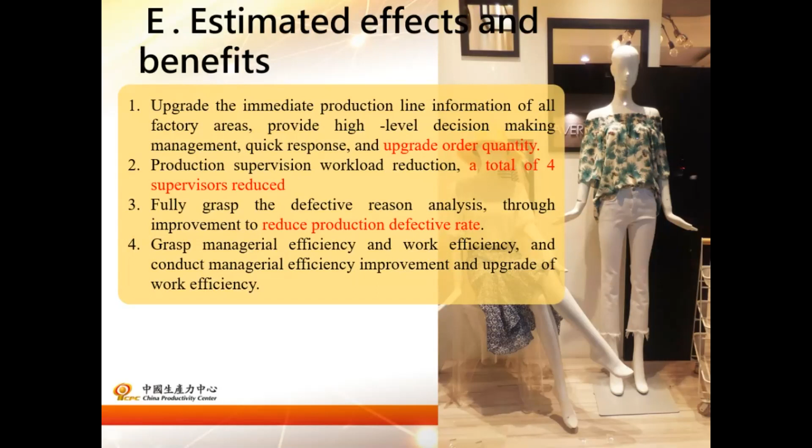And this is the general achievement that I can share with you right now. Thank you, that concludes my presentation.